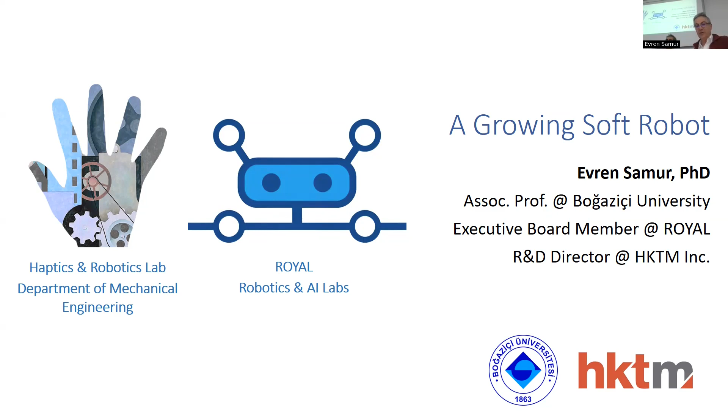Evren is actually one of our own, I would say. He has the Haptics and Robotics Lab and is an associate professor in the Department of Mechanical Engineering at Boğaziçi University. He's also the R&D director at HKTM, a robotics company specializing in motion control technologies. He received his PhD in robotics from EPFL, Switzerland in 2010. His PhD thesis was awarded as the best PhD thesis of 2010 by the Euro-Haptics Society. He was a postdoctoral fellow at Northwestern University in 2011 and a Fulbright visiting professor at Boston University in 2021. His research interests include soft robotics, medical robotics, industrial robotics, marine robotics, collaborative robots, robotic grippers, and haptics.

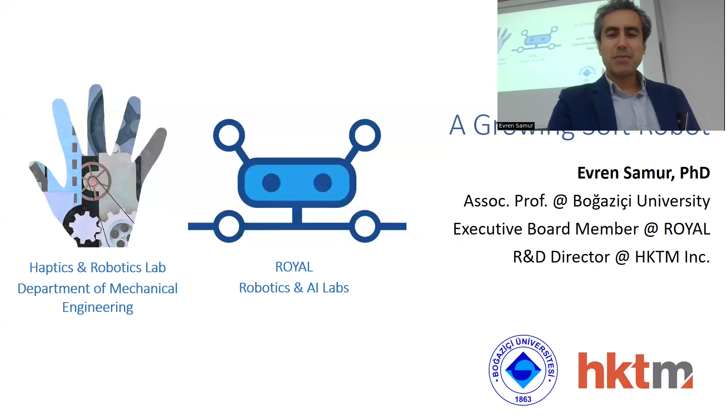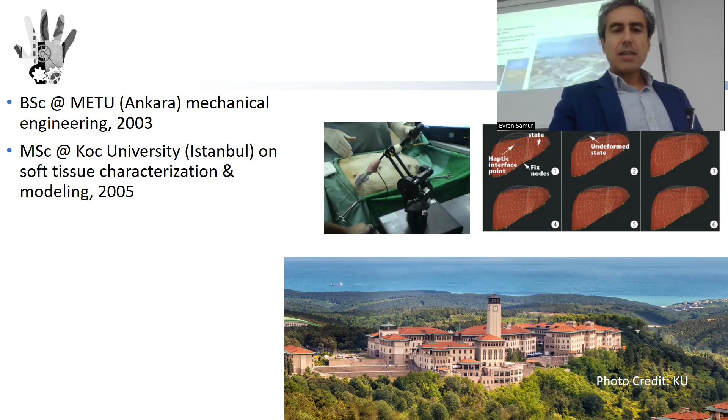So I'm going to talk about a research project which is about a growing soft robot, but I'm excited. Brief bio: I graduated from Middle East Technical University in 2003 from the Mechanical Engineering Department. Then I moved to Koç University, and at that point I started to work on haptics with Çağatay Başdoğan. Then I moved to Switzerland and I did my PhD on, again, haptic interface evaluation and some medical robotics.

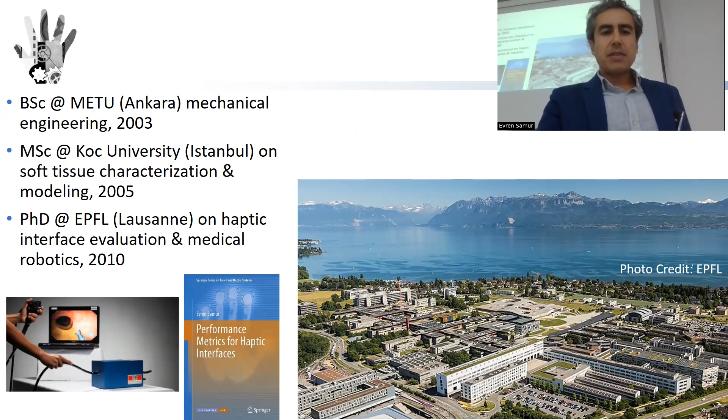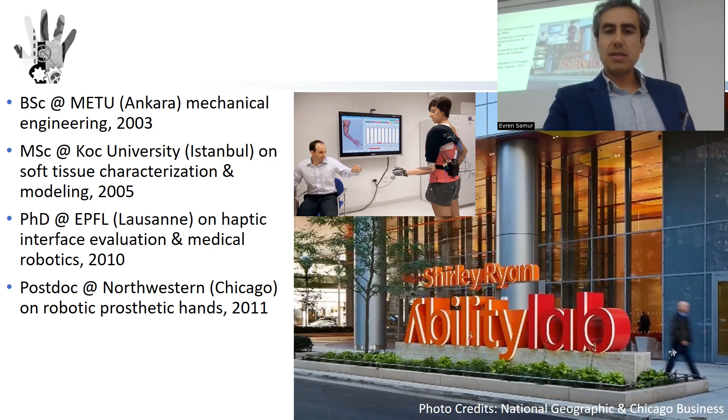After my PhD, I went to Northwestern Medical School in Chicago, where I worked on robotic prosthetic hands, specifically on how to give haptic feedback to prosthetic users. Then I came back to Turkey. I'm an associate professor now at Boğaziçi University, and two years ago I was visiting Boston for my sabbatical.

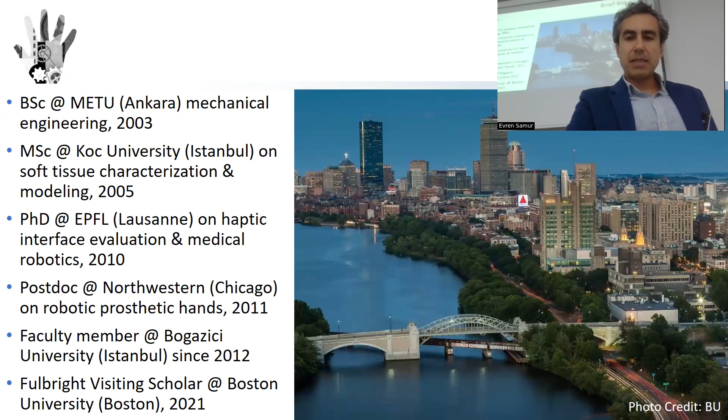Very short information about my lab: we work on novel robotic and mechatronic systems. Our main field is mechatronics, so we deal with hardware and their control, and related software programming for those mechatronic systems. We work with industrial partners and sometimes medical partners for the application of those systems. Currently we have 4 PhD students and 5 master's students, and most of them are working on soft robotics these days.

I would also like to talk about our project called ROYAL, Robotik ve Yapay Akıl Laboratuvarları, because this is the sister of ROMER. We were funded in 2019 as well, and there are 20 faculty members involved in this project. The idea is bringing together all those robotics and AI labs from different departments, including engineering, social science, and education. We will also have our centralized labs, so we will basically increase the collaboration among the partners.

I thank Erol Hocam and Mert Hocam for giving me a tour today to ROMER, and it's really nice to see all those developments. I hope we will have the same at Boğaziçi University.

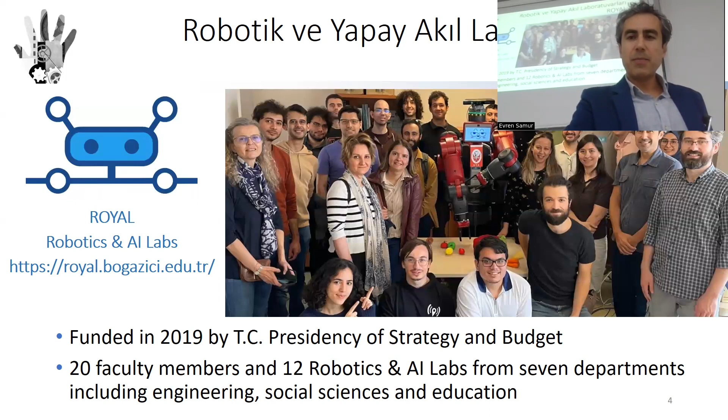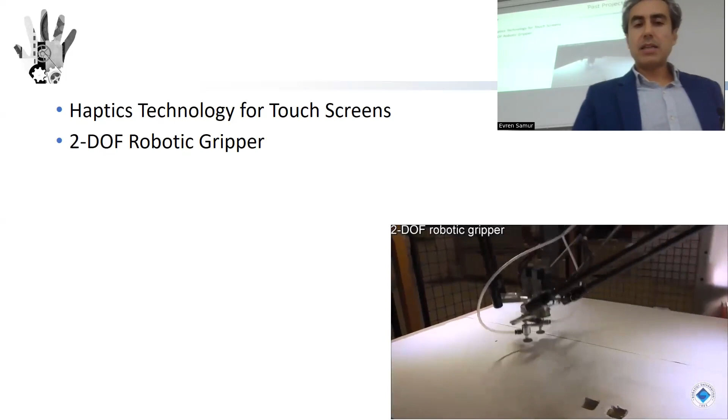Okay, so in our lab, some of the past projects are related to haptic technology. We developed tactile feedback systems for touch screens. We also worked with industrial partners to develop robotic grippers that take two objects simultaneously which are coming randomly, requiring computer vision and a dedicated gripper.

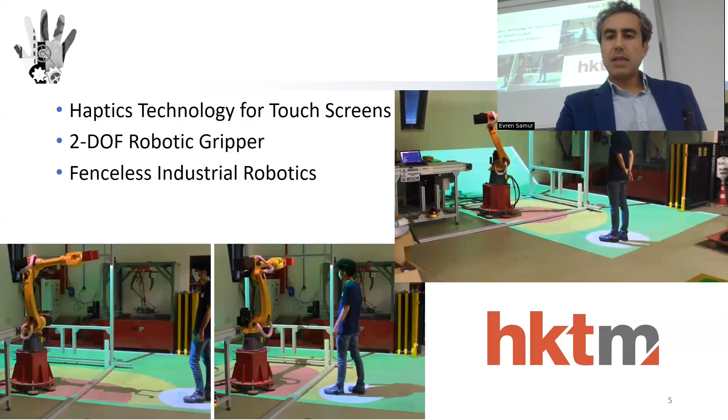Another project related to industrial robotics is developing an augmented reality-based safety system for industrial robots, so that you can implement it and make industrial robots fenceless—safe to interact with like collaborative robots. That was a project with the company HKTM.

We also worked with ETH Zurich Rehabilitation Engineering Lab, and we developed an environment recognition system that can be integrated into exoskeletons, so that exoskeleton users who cannot walk without those systems can use this environment recognition system to facilitate the control of those robotic systems. These are some sample past projects.

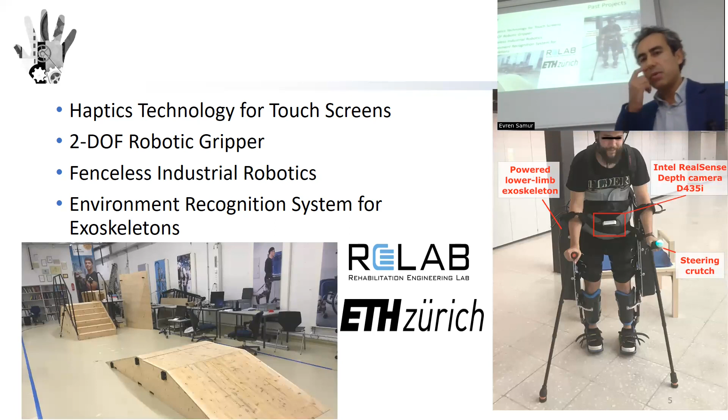Today I'm going to focus on soft robotics, and I'll explain our growing soft robot, whose intended application was endoscopy. That's why I'm going to talk about endoscopy, colonoscopy a little bit, and also soft robotics, just to give you an idea of what I mean by soft robotics.

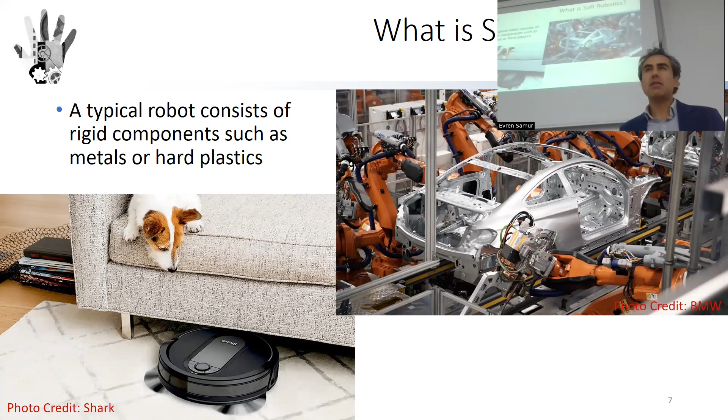As you all know, a typical robot you come across is made of rigid components like metals or hard plastics. But if you are interacting with humans, safety requirements force you to use safer materials like soft materials, so that if there's a physical interaction between the human and the robot, the results are not detrimental.

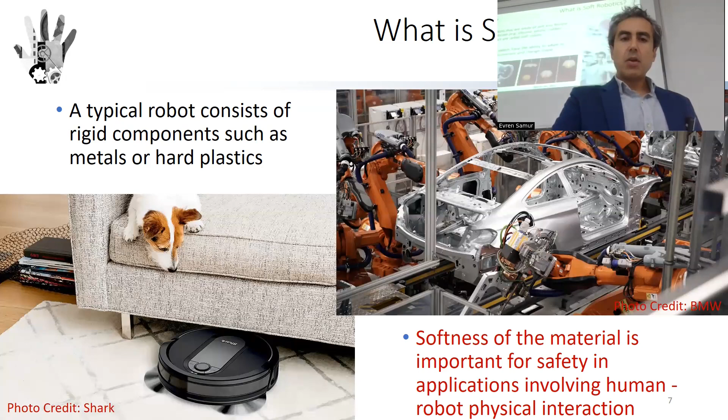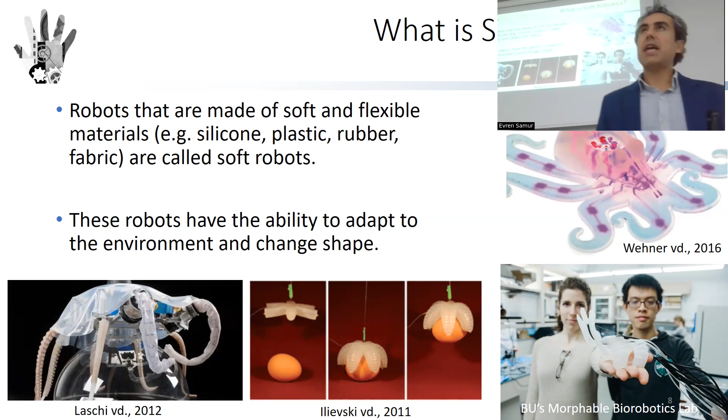Robots made of soft and flexible materials like silicone, plastic, rubber, or fabric are called soft robots. It's a very trendy topic these days because these robots have the ability to adapt to the environment, so they can change their shape and adapt very well to the environment.

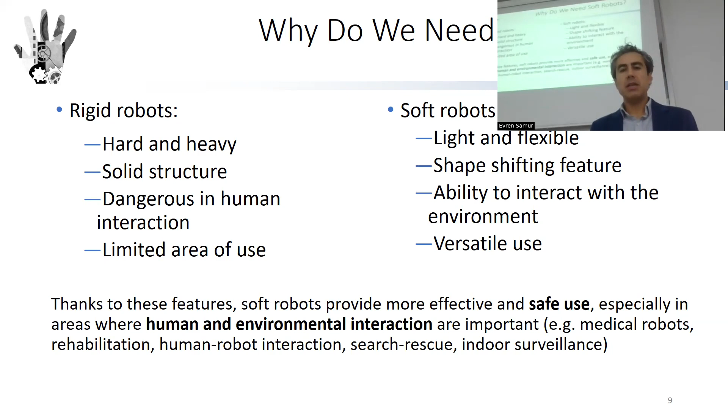So why do we need them? Because they are light, flexible, they can change their shape, and they can interact with the environment. That makes them safer.

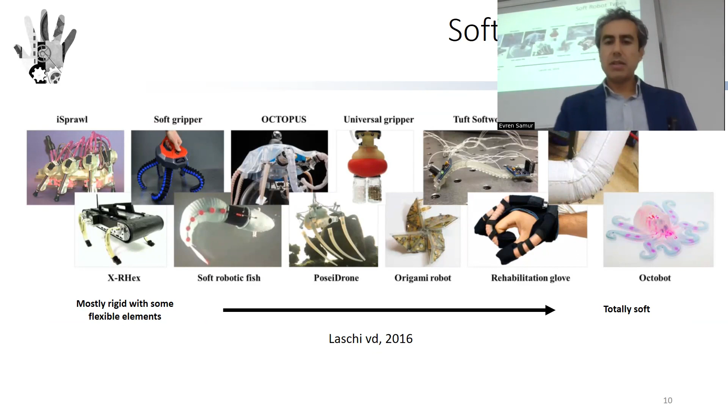If you look at the literature, there are totally soft robots, but there are also rigid robots with some flexible elements, and you can develop robotic and mechatronic systems somewhere in between these two. Here are some examples.

For instance, recently, researchers developed magnetic machines. Using a magnetic field, those soft materials change their shape, and you can use this changing shape to actuate a pump, or you can use it to deliver a drug inside the body. So miniature magnetic machines is a promising subtopic of soft actuators, basically.

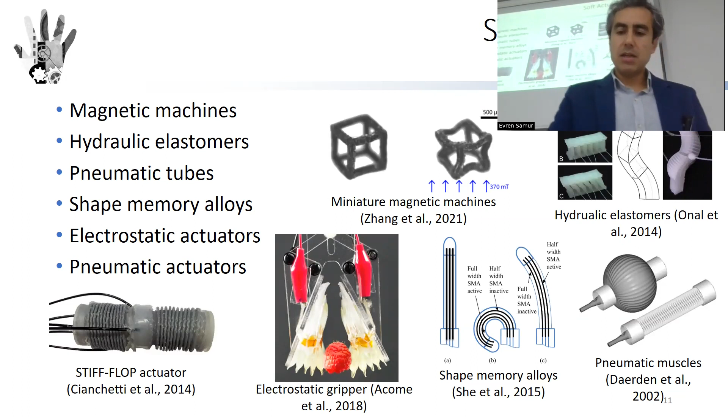Historically, hydraulic elastomers, pneumatic tubes, shape memory alloys, pneumatic actuators are used a lot. You can also use electrostatic actuators to develop soft actuators, so you can embed those actuators inside the soft robot. Here are some recent examples.

One promising area is robotic surgery, because you all know the Da Vinci robot. It's a rigid robot, but used a lot for laparoscopy. Although the wrist mechanism of the Da Vinci robot is great, they still don't have enough mobility because they are rigid. So if you can make a soft robot that has higher mobility, higher dexterity, that will be really beneficial for the patient. If you imagine traveling inside the veins, for instance, to do some fine surgery, soft robots would be really beneficial for the patient.

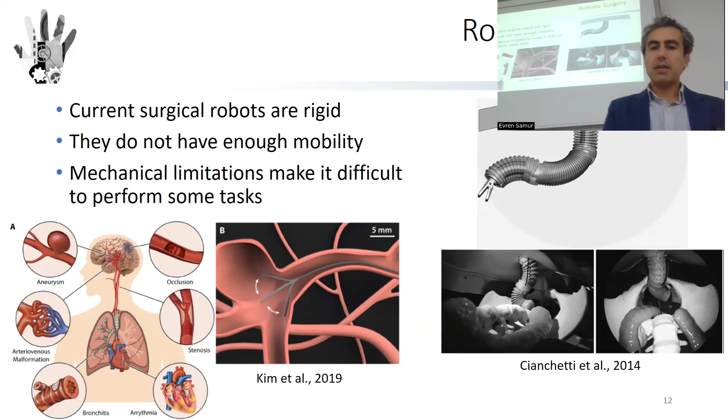You can also develop wearable robots, like hand exoskeletons for physical therapy. Instead of rigid interaction with the human body, those soft interactions will accelerate the recovery of the patient during the physical rehabilitation process because of their compliant nature.

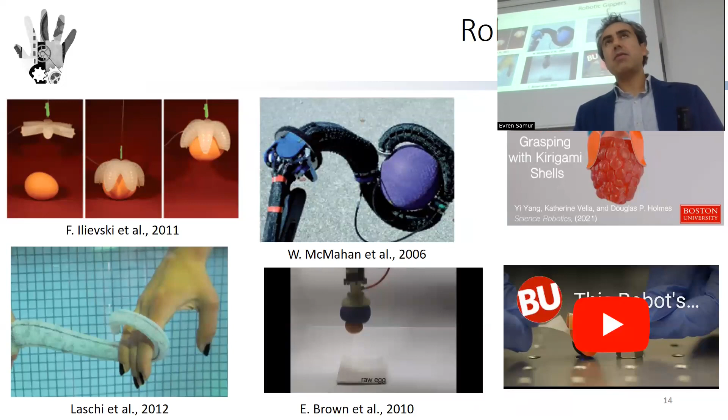But robotic grippers are becoming softer and softer because you would like to manipulate any delicate object as well, like fruits or fragile eggs, for instance. So if you can develop a gripper that is not made of rigid elements, you can achieve those manipulations.

Okay, now we are coming to growing robots. It is a subdomain of soft robotics, so as the name implies, they grow. The length of the robot changes extremely - it's not like elongation of a balloon, it's like from centimeters to meters. Stanford researchers, Elliot Hawkes and his colleagues, developed those kinds of robots.

Using the eversion technique, they developed this prototype that can be used for search and rescue operations because you can make this robot pass through narrow openings and reach areas no other robot can reach.

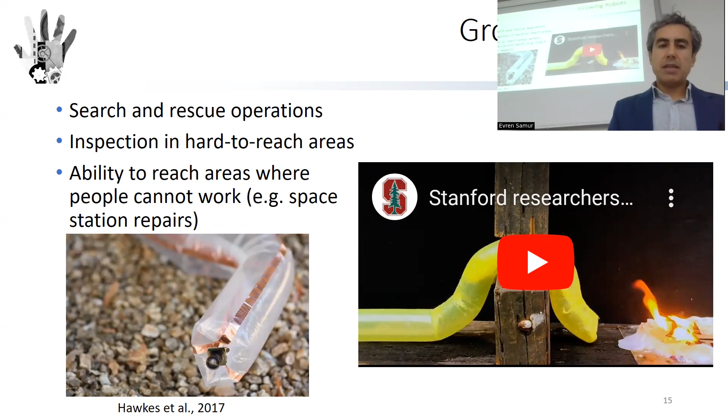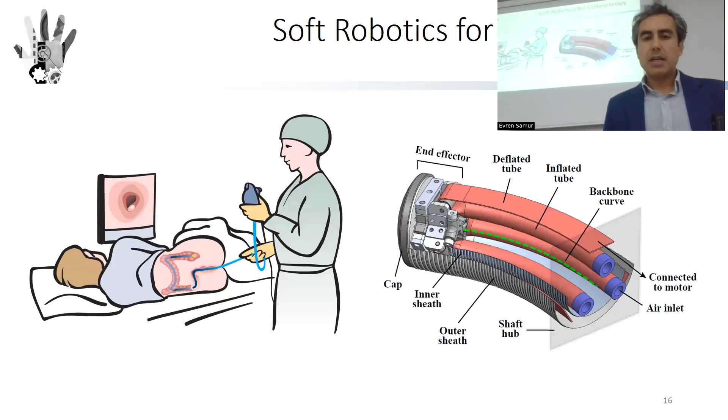Now this brings us to soft robots for colonoscopy. Let me explain what colonoscopy is - it is a procedure to screen the colon, and to perform minor endoscopic procedures inside the colon. You can remove a polyp, or do biopsies to investigate the tissue, or just visualize inside the colon.

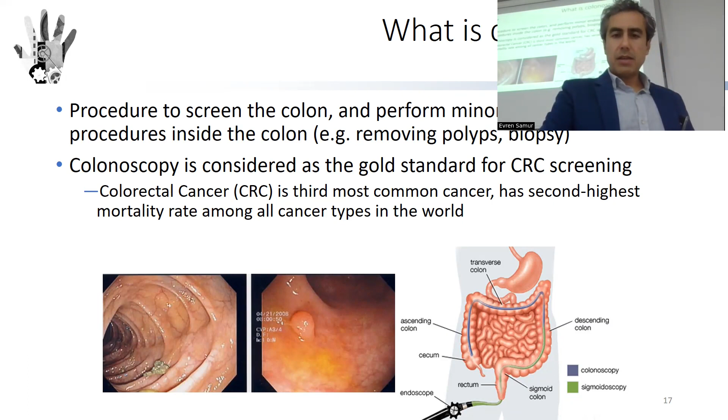It is considered to be the gold standard to detect colorectal cancer, so it is recommended if you're older than 40 years old. Colorectal cancer is the third most common cancer and has the second highest mortality rate among all cancer types in the world. This procedure is really important and is performed routinely every year on many patients.

The problem with the current colonoscopy procedure is that the endoscopist pushes the colonoscope inside the colon, providing physical effort while standing up during the whole operation. The duration is typically 25 to 30 minutes, but it can take up to 60 minutes, and in extreme cases longer. During this time, 25% of patients feel pain due to mechanical forcing, but there's also psychological distress that makes the patient irritated from the operation.

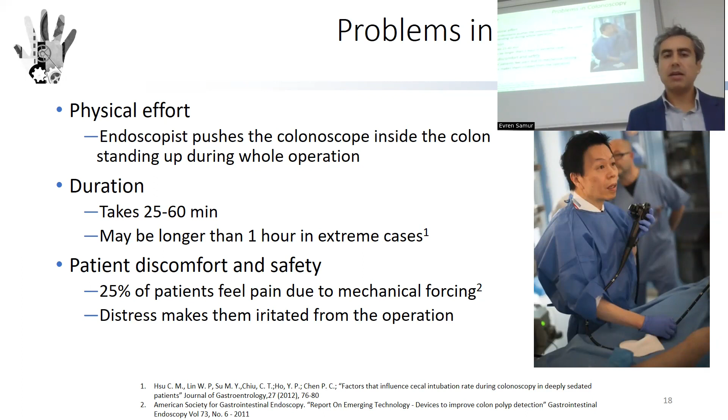So that's why, if we can improve those three items in the current colonoscopy operation, the patients and the operators will benefit.

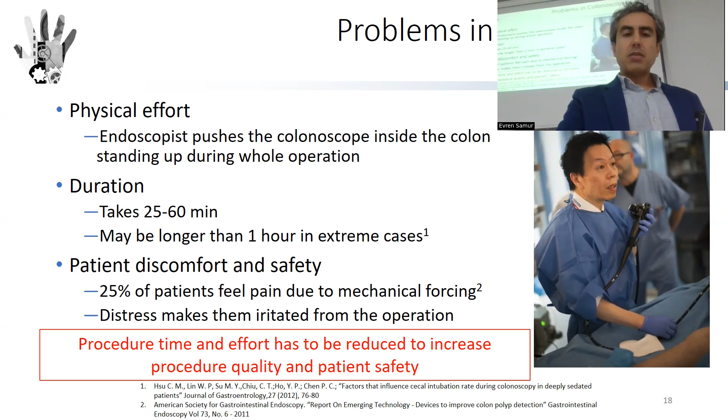Our goal was to reduce the procedure time and effort to increase the procedure quality and patient safety. So the solution is robotic colonoscopy.

I'm going to talk about the details in a minute, but it is controlled by a human operator sitting next to the patient. So teleoperation is used to control the speed and the position of the robot inside the colon.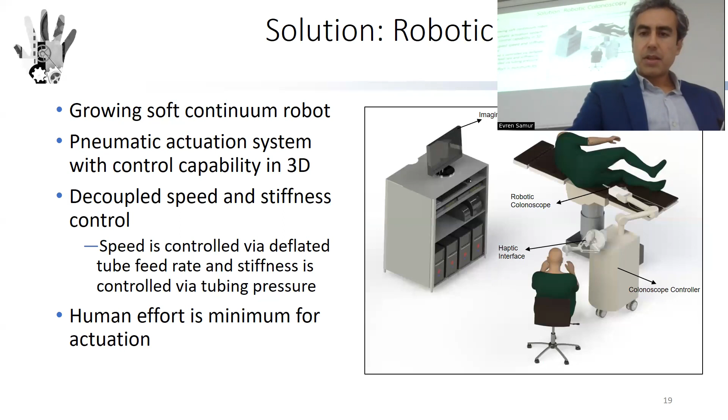Just some background information. I came up with this idea when I was in London at the Hamlyn Symposium on Medical Robotics. I love going to conferences because you come up with great ideas there. Changing your location from your current work really sparks some ideas. In 2013, I came up with this idea, and then we applied and filed a patent.

The priority date, you can see, is early 2015. At that time, we didn't know about the growing robot, so Elliot Hawkes and his colleagues hadn't come up with that idea yet, but they came up with a better idea, and now the growing robot is a really interesting area of soft robotics and growing a lot.

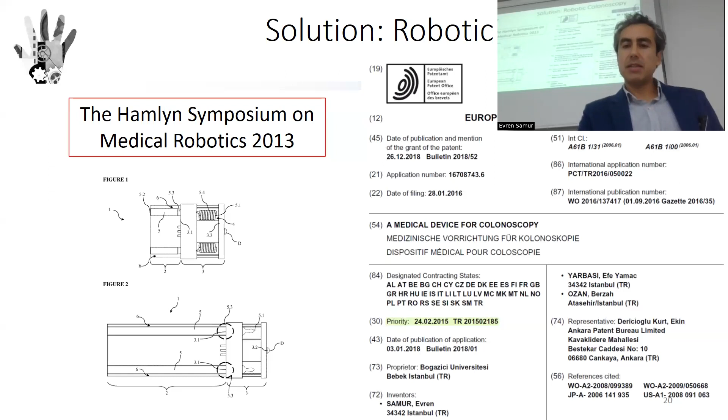Here is our growing soft robot. The working principle of our growing robot is based on what we call the pinch roller drive. There is a flexible tubing. In this image, you can see that white balloon, white tubing. This flexible tubing passes in between two rollers, two bearings basically, and the slack section of the tubing is wrapped around the spool.

So when you provide pressure inside the tubing, and if you release the spool, then the base is moved forward. And if you pull back the slack section while reducing the pressure, you pull back your robot. That's the idea of our growing soft robot.

As I said, it's different from the Hawkes growing robot, which is based on inversion—a very clever idea. But their problem is that it's one-dimensional. Here, if you use three of those pinch roller drives, as you can see on the left-hand side, you can control the growing and the orientation of your robot in three dimensions.

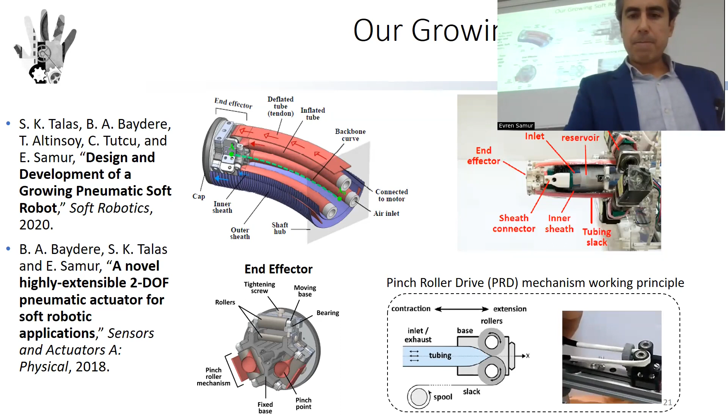If you look closely at the tubings, there were some problems we had to deal with. We tried different materials, off-the-shelf tubing, and it didn't work. So we had to work with a tubing company in the UK, and they developed a composite tubing for us, with a flexible inner layer to avoid leakage and a harder outside layer which prevents radial elongation.

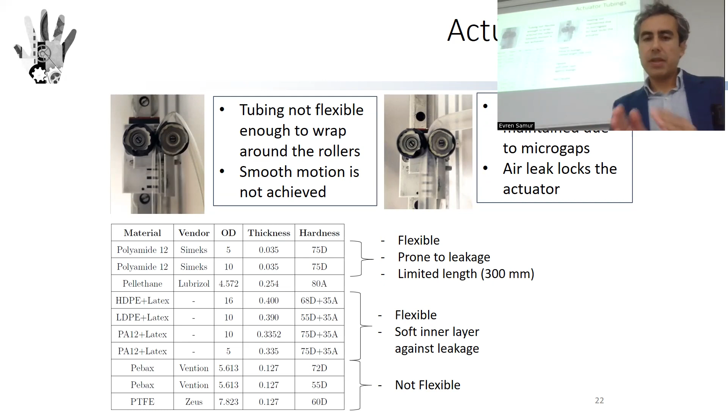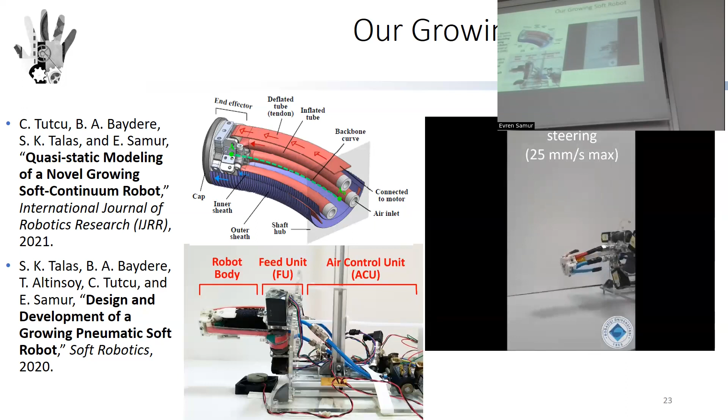In this video, you can see how it works. You release the tubing, release the spool, and at the same time it elongates. You can control its direction by releasing the slack section differently. With this, you can carry the weight of the robot itself and position it in 3D space.

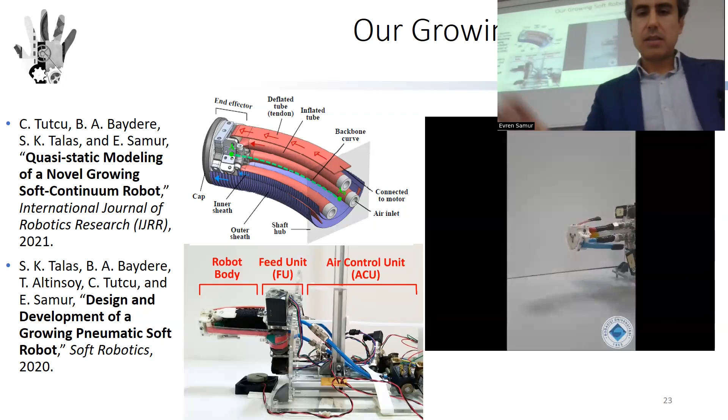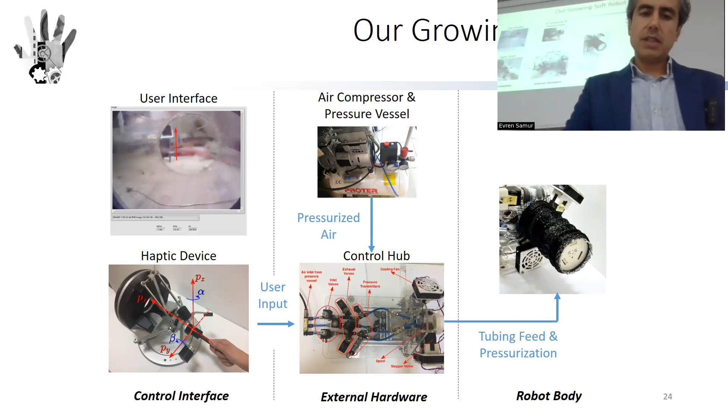We use a haptic device—you can see here, the Omega 7—to control it. There was a camera at the tip of the robot, so you can get the image in front of the robot. Of course, we have some mechatronic hardware like an air compressor, pressure vessel, and a control hub to control the release of the slack section of the tubings.

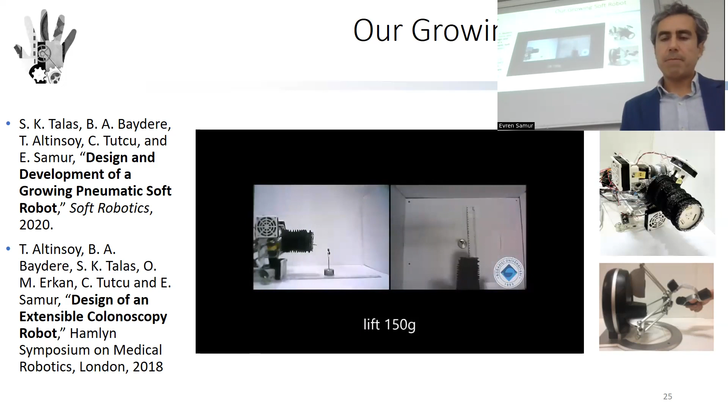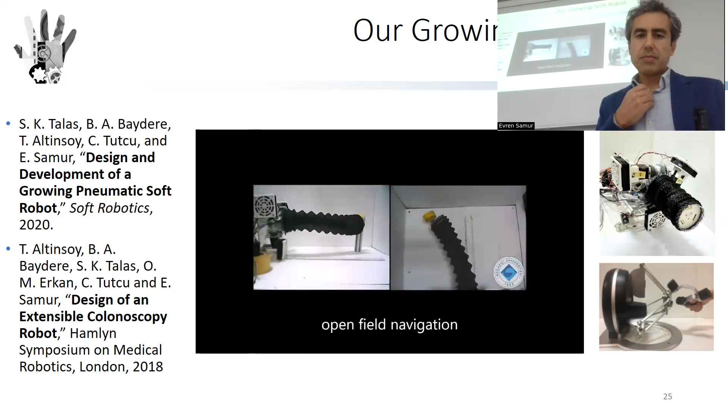So finally, we got this prototype, and here you can see some tests, like how we can lift weights and position the robot in 3D. Everything is controlled with teleoperation using a haptic interface. In this open field navigation, the user is directing the robot to the goal point.

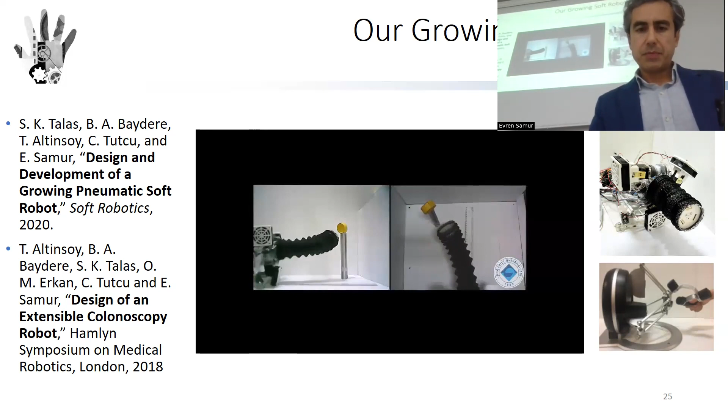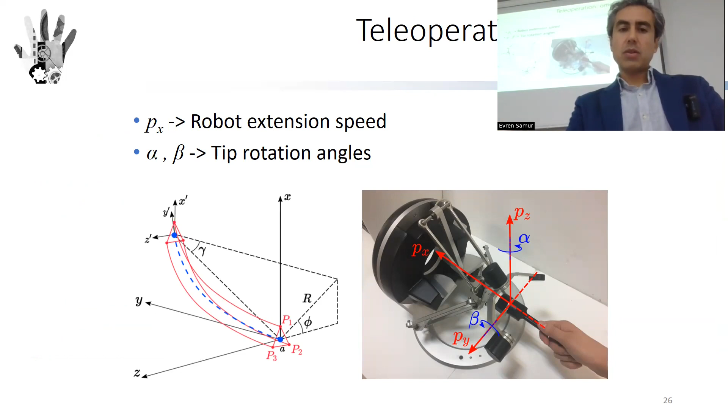The control behind the teleoperation is straightforward. The position input is fed back to the robot as extension speed for translation, for elongation, but we use the rotation of the haptic device to control the rotation of the orientation of the tip of the robot.

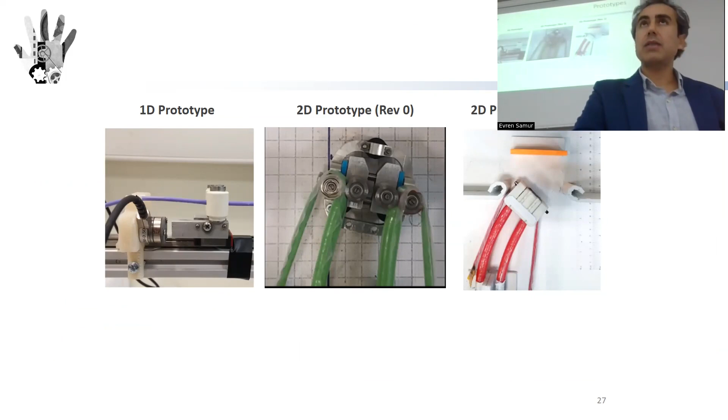So we developed several prototypes. It took 3 years to get to the final version. With the 1D prototype, we did some tubing testing. With the 2D prototype, we proved the concept, improved it, and performed some navigation tests.

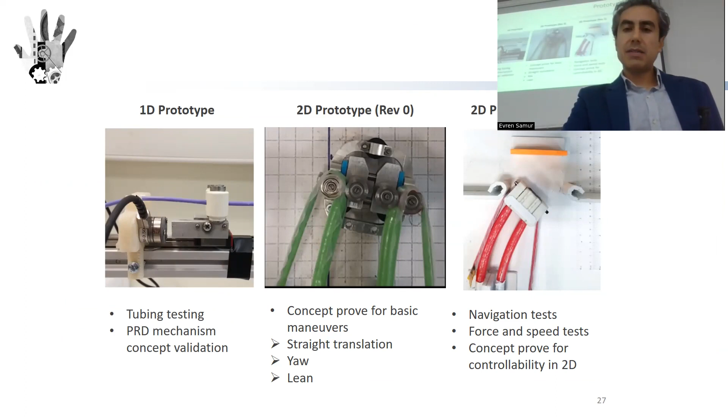Finally, we developed 3D prototypes, two of them large scale. And finally, we developed a small scale prototype, with an outer dimension of 15 millimeters, and the length of the robot is 1.8 meters. So it is comparable to a classical colonoscope. That was the ultimate goal, to replace the clinical endoscope with our robot. So we got to that size.

So we had all these tubings, but unfortunately, navigation testing in 3D didn't result in what we expected. So we still need to do some improvements to be able to obtain a clinical prototype.

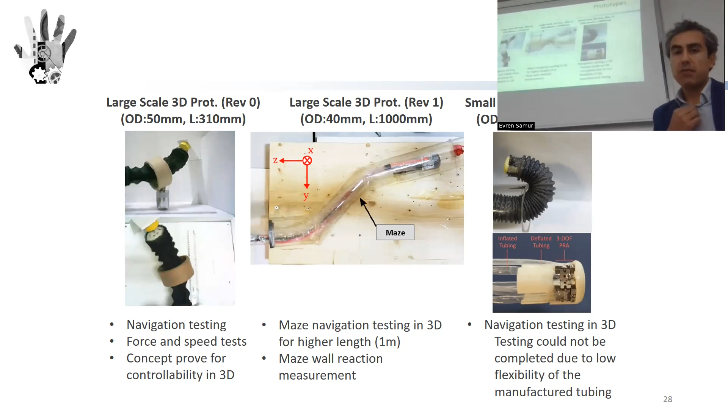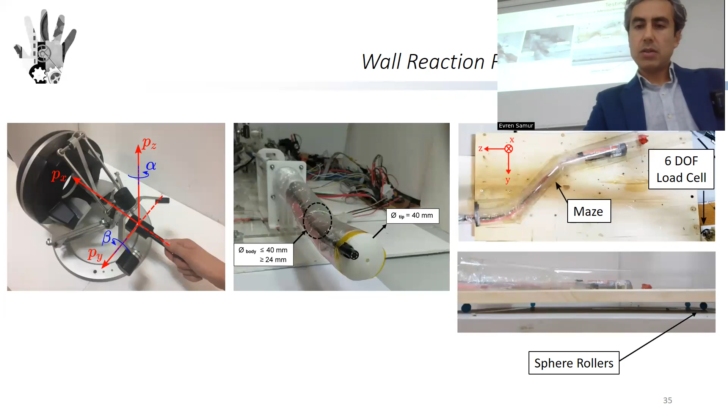But we did some tests with the large scale version, which has an outer diameter of 40 millimeters and a length of 1 meter. We did navigation tests, and also maze navigation, and we measured the reaction forces to compare with the clinical colonoscope. So I can show you some results here.

As you can see here, in this maze, the wall reaction forces are less than 1 Newton. But if you look at the literature, conventional colonoscopes can generate forces up to 10 or 15 Newtons. Of course this is lab testing, while the others are from real operations, but at least we showed that we can navigate in a maze without forcing too much the walls of the test maze.

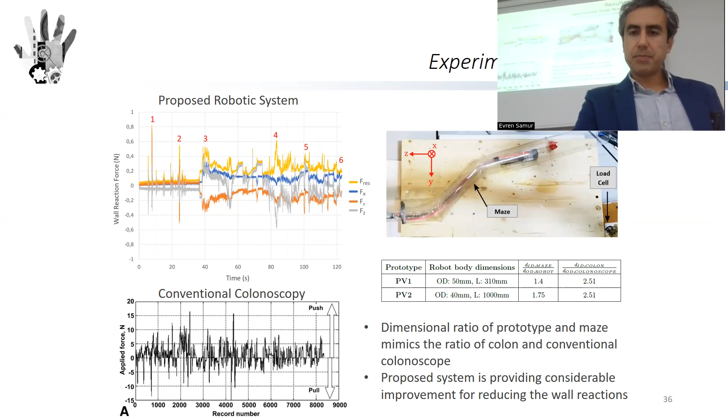As I said, we are still working on it. We need to work on the validation tests of the small scale prototype, and then if we can validate our prototype, we can continue with the clinical trials.

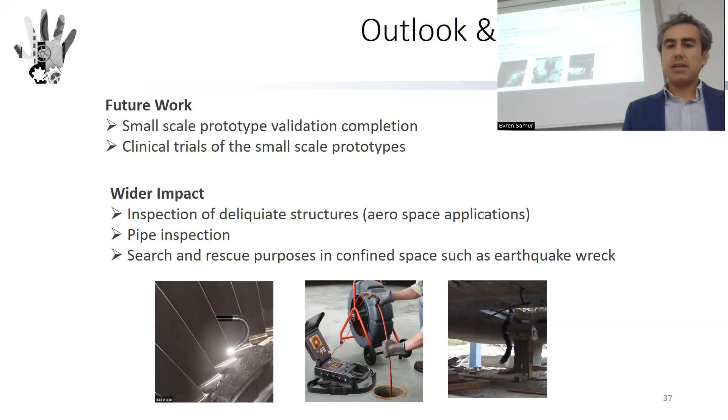That is still ongoing, but we are also looking for other areas that we can use these growing soft robots. One application area could be inspection of structures, like for aerospace applications, or for pipe inspection in the energy sector, or this could also be used for search and rescue operations for earthquake victims, basically.

I would like to acknowledge my collaborators and my students. All these prototypes were developed by PhD students and master students. We collaborated with Boğaziçi University Biomedical Engineering Department and also Acıbadem University Medical School, and we had a partner from medical industry. This project was funded by TÜBİTAK 5 years ago, and I'm really happy that we obtained a prototype that works fine, and hopefully we will move to the clinical stage.

I would like to conclude my talk with some breaking news. As I said, I'm also the director of the HKTM company. Last year we submitted a proposal to Horizon Europe, and the project was funded. We signed the grant agreement, so everything is going well.

By January 1st, we will start a new project called Safe, Healthy, and Environmental Ship Recycling. HKTM will be the coordinator of 16 companies and universities all over Europe. Our goal is to really use robots in the ship recycling areas.

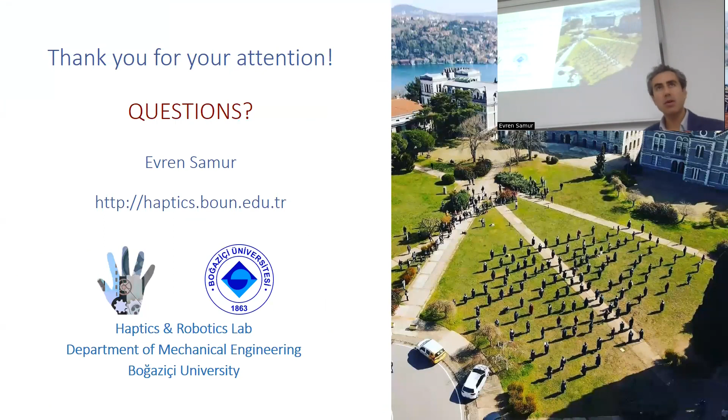Okay, with this breaking news, I would like to conclude my talk, and I would be happy to answer your questions.